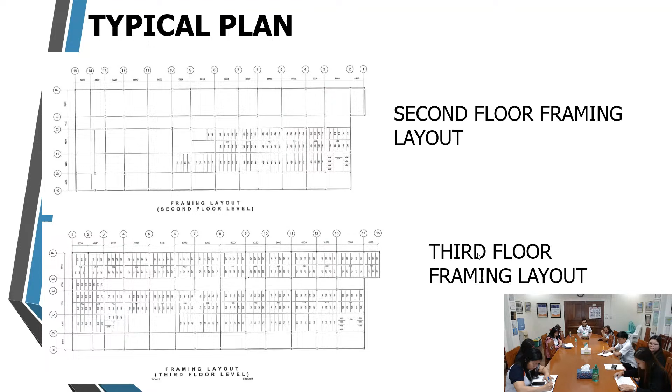For the typical plan, we have here the second floor framing layout and the third floor framing layout. For further details, please refer to the posted plan. Also, we have the fourth floor framing layout and the decking layout.

Major category of works: buildings, construction with piles, low-rise steel frame, cast-in-place piles, 1 to 5 stories. For similar categories of work: buildings, construction with piles, high-rise steel frame driven piles; building, industrial plant, low-rise; building, industrial plant, high-rise; building, industrial plant, medium-rise.

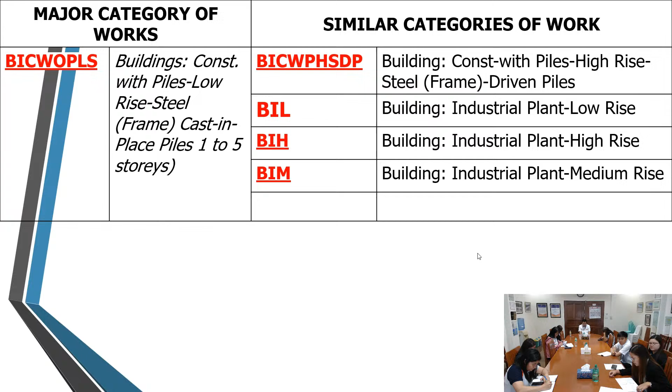For the list of key personnel, followed by minimum years of similar experience in the same position, then minimum years of related experience: For project manager, 5 years same position, 5 years related experience. For project engineer, 3 years same position, 3 years related experience. Materials engineer, 3 years same position, 3 years related experience. For foreman, 2 years same position, 2 years related experience. For skilled laborers, common laborers, and construction safety and health personnel, none.

For the list of key equipment, we have here the description, capacity, and required units: cutting outfit, 1 unit required; welding machine, 500A electric driven, 2 units; truck-mounted crane, 41 to 45 MT, 1 unit; generator set, 1 unit.

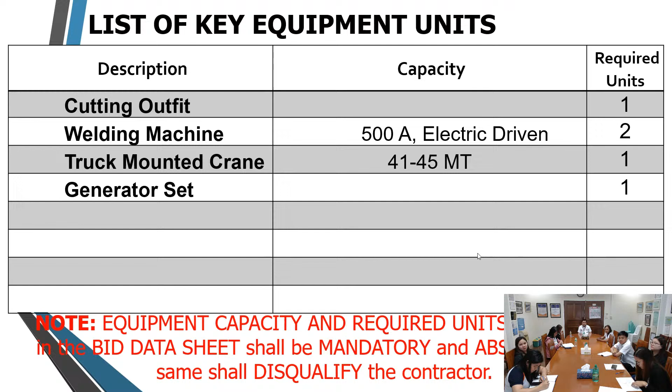Please note that equipment capacity and required units as specified in the bid data sheet shall be mandatory, and absence of the same shall disqualify the contractor. Any questions or clarifications for 24FK0030?

For 24FK0031, Cluster 6, Organizational Outcome 1: Ensure Safe and Reliable National Road System, Network Development Program, Construction of Bypass and Diversion Road. Construction number 1: Construction of Bypass Road, Sorsogon - Bacon via Buhatan, San Vicente, San Isidro, San Roque-Balete, Poblacion, Sorsogon. Number 2: Construction of Bypass and Diversion Roads, Roads-Juban-Casiguran via Mabini Bypass Road, Sorsogon.

Implementing Office: Construction Section. Funding Source: GAA 2024. Approved budget for the contract: 125 million, 899,983 pesos and 84 centavos. Contract duration is 305 calendar days.

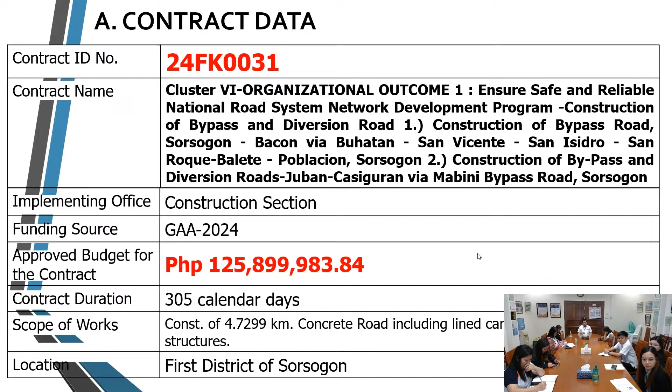Scope of works: construction of 4.7299 kilometer concrete road including lined canal and slope protection structures. Location: First District of Sorsogon. For the location, please refer to the posted plan.

For the typical plan, the width is 3.05 meters per lane. Thickness is 0.23 meter on carriageway, and the shoulder thickness is 0.2 meters. For further details, please refer to the posted plan.

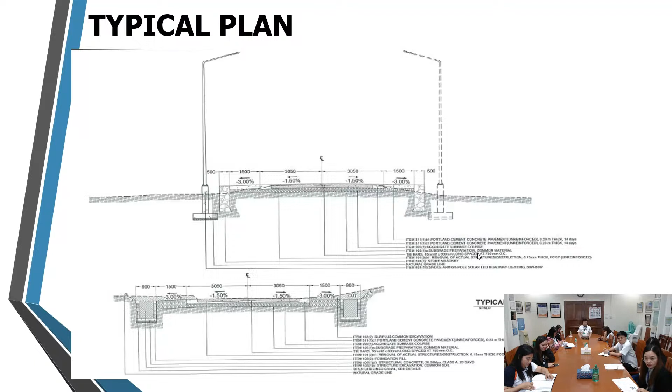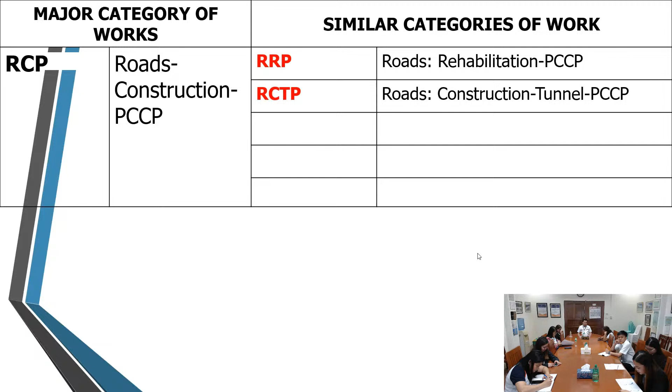Major category of works: road construction, PCCP. Similar categories of work: roads rehabilitation, PCCP; roads construction, tunnel, PCCP.

List of key personnel: minimum years of similar experience in the same position, and minimum years of related experience. For project manager, 5 years same position, 5 years related experience. For project engineer, 3 years for same and related experience. For materials engineer, both 3 years for same position and related experience. For foreman, both 2 years for same position and related experience. For skilled laborers, common laborers, and construction safety and health personnel, none.

For the list of key equipment units, we have here the equipment capacity and number of units. For loaded trailer, 25 MT, 1 unit. For backhoe attachment or the pavement breaker, 1 unit. Payloader, LX80-2C, 1.50 cubic meter, 110 HP, 1 unit. For dump truck, all models, 12 cubic yard, 290 HP, 2 units.

For bulldozer, DX175, 167 HP, 1 unit. For payloader at disposal site, motorized road grader, vibratory roller: 1.5 cubic meter, 110 HP, G710A, 140 HP, SD100DC, 10 MT, 125 HP, all 1 unit.

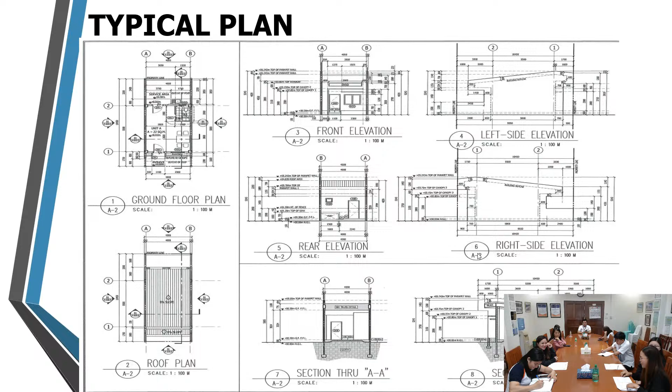Major category of works: Buildings. Construction without piles, low-rise, concrete frame, 1 to 5 stories. Similar categories of work, building: construction with piles, high-rise, concrete frame, cast-in-place piles. Building concrete: construction with piles, low-rise, concrete frame, cast-in-place piles. Building: construction with piles, high-rise, concrete frame, driven piles. Building concrete: construction with piles, low-rise, concrete frame, driven piles. Building, construction without piles, high-rise, concrete frame.

Similar categories of work: Building, industrial plant, low-rise. Building, industrial plant, high-rise. Building, industrial plant, medium-rise.

For the list of key personnel: Project manager should have a minimum experience of 5 years similar experience, same position, and 5 years for related experience. Project engineer, 3 years same position, 3 years related experience. Materials engineer, 3 years same position, 3 years related experience. Foreman, 2 years same position, 2 years related experience. For skilled laborers, common laborers, and construction safety and health personnel, none.

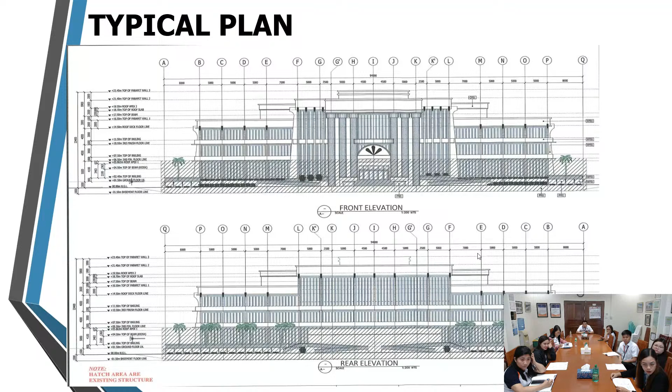For the major category of works: buildings, construction without piles, low-rise, concrete frame, 1 to 5 stories. For similar categories of work: building construction with piles, high-rise, concrete frame, cast-in-place piles. Building construction with piles, low-rise, concrete frame, cast-in-place piles.

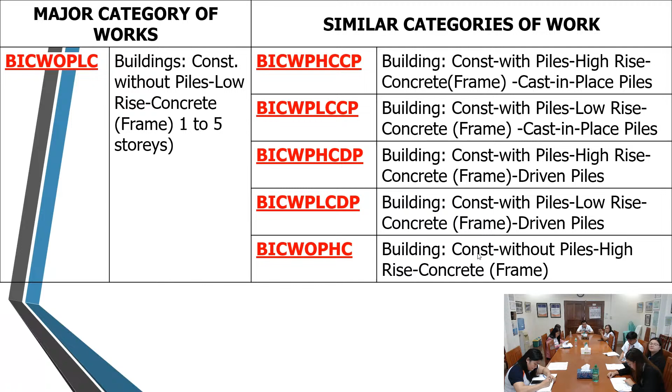For building construction with piles, high-rise, concrete frame, driven piles. Building construction with piles, low-rise, concrete frame, driven piles. Building construction without piles, high-rise, concrete frame. For major category of works, buildings, construction without piles, low-rise, concrete frame, 1 to 5 stories. For similar categories of work: building, industrial plant, low-rise; building, industrial plant, high-rise; and building, industrial plant, medium-rise.

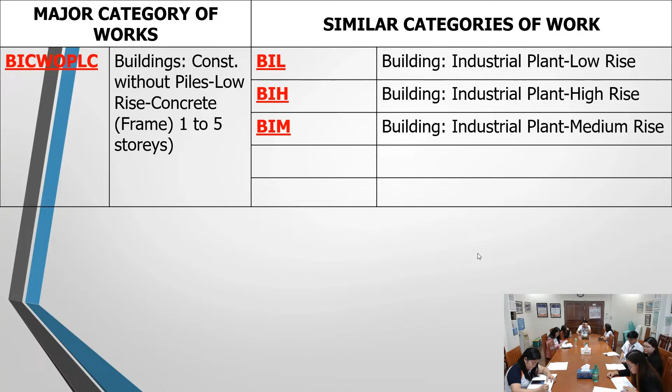For the list of key personnel, for project manager: minimum years of experience, same position, 5 years; related experience, 5 years. For project engineer: 3 years same position, 3 years related experience. For materials engineer: 3 years same position, 3 years related experience. For foreman: 2 years same position, 2 years related experience. For skilled laborers, common laborers, and construction safety and health personnel: none.

For the list of key equipment units, we have here cargo truck, capacity of 9 to 10 MT, 27 HP, 1 unit. Please note that equipment capacity and required units as specified in the bid data sheet shall be mandatory, and absence of the same shall disqualify the contractor.

Any questions or clarifications for 24FK0033.

Thank you, Engineer Manisola. Engineer Liwanag, please proceed with your presentation of the schedule, the eligibility requirements and criteria for eligibility screening, to be followed by Engineer Castro for the presentation of the bid evaluation, post qualification and award.

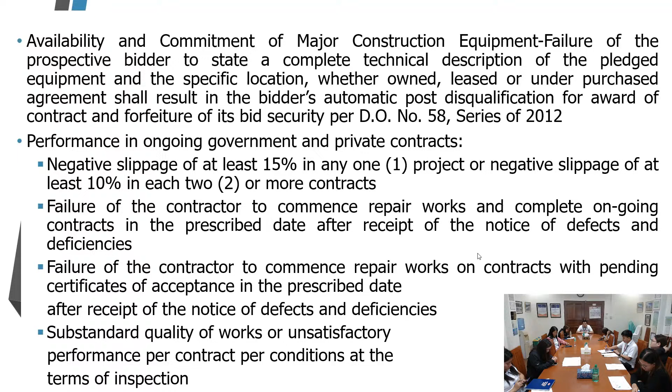Failure of the contractor to commence repair works on contracts with pending certificates of acceptance within the prescribed date after receipt of the notice of defects and deficiencies. Substandard quality of works or unsatisfactory performance per contract, or conditions at the time of inspection.

D.O. number 127 series of 2018: strict application of RA 9184 in the conduct of post-qualification of bidders with delayed ongoing contracts with the DPWH, and authenticity and correctness of bid security. For the financial requirements: bid price proposal and NFCC.

Notes on the personnel and equipment requirements of the project as per D.O. number 9 series of 2012, and technical requirements for civil works projects for public bidding. If the proposed key technical personnel is an employee of the bidder and is working on another project at the same time as the bidding,

the bidder shall submit a certification that the personnel will be pulled out from the ongoing project once the bidder is awarded the contract, and that he or she will be replaced with another person of equal or better qualifications, as certified by the head of the implementing office. The bidder may propose a key technical personnel who is not its employee, provided that

said personnel submits a certification that he or she will work for the bidder if the contract under bidding is awarded. These certifications shall be included in the first envelope of the sealed bid.

Also to be verified during post-qualification is the set of equipment pledged by the bidder. The bidder should specify in the submitted bid the location of the equipment where it can be inspected. If any equipment is not found in the specified location, the bidder shall be post-disqualified.